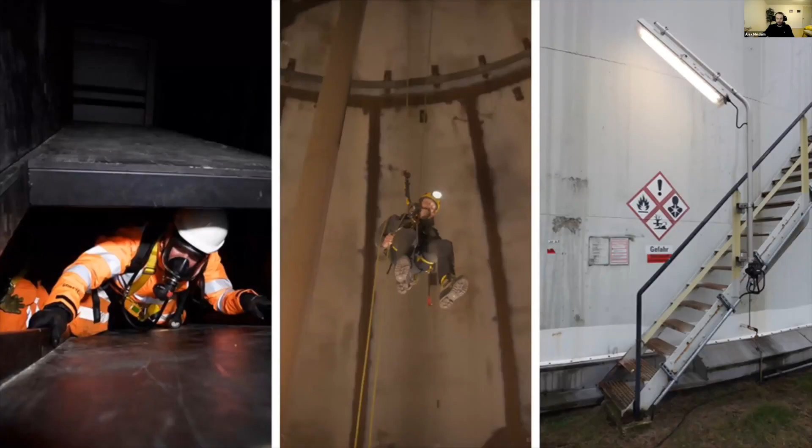A few words about Flyability. We're a pretty unique company in the sense that we are attacking a niche of an industry that is mainly focused on outdoor drones, from a pretty unique angle, which is that of collision tolerance and flight in confined spaces. We have one very clear goal, and that's no more humans doing dangerous jobs. Pretty vast indeed, but we're targeting three main work environments: one being confined spaces, the other being work at heights, and the last one work in hazardous environments - could be a radioactive environment or an area with toxic dust and things like that.

In terms of company, we were founded in 2014 after the Fukushima incident, where basically they were trying to get into that nuclear power plant. They weren't able to get in with ground robots because of all the rubble, and they weren't able to walk in because of the radiation. So a drone was the right solution to the situation, and that was really the inception of this technology that we're distributing today. We were students at EPFL at the time, but today we're a team of 100 people.

We have about 1,000 drones out on the field with 400 customers across the globe, and we have a pretty robust network of resellers and partners who can sell, distribute, and train. We work in a lot of different industries, ranging from oil and gas to public safety and power generation, chemicals, mining. All these industries have areas where you'd rather not send people in, and that's where we hope to help. Our clients are either large service providers, companies like Matt's, or asset owners who have an internal drone department.

Talking about indoor drones, they're very interesting technology. And before I get into the midst of it, I want to remind you it's still a pretty new and novel technology. I got a reminder of that a few months ago, right around here at Edgar Mine.

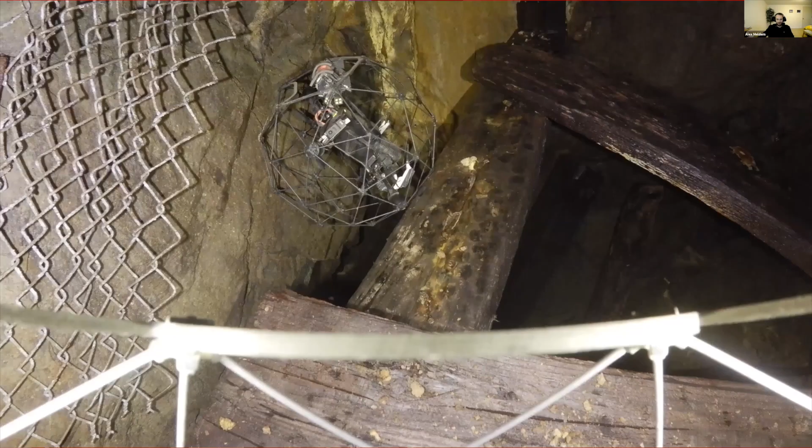You probably won't recognize where this picture was taken because it was in Edgar Mine, where nobody's supposed to climb up there. I was fortunate enough to, on my second flight in that area, get my drone stuck. The drone with which I took the picture of that drone also got stuck right next to it. That one I managed to dislodge and get back. The other one I now have in my possession again, but it is completely destroyed.

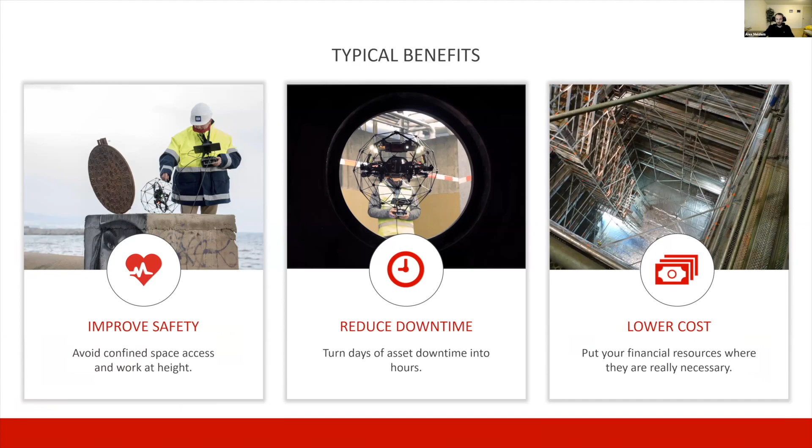Why use a drone for inspection in confined spaces? It's basically the same value proposition as any robotic solution. We're going to make the operation safer altogether. You're not sending somebody into a confined space or an area at risk of collapsing. We're going to reduce downtime because you're not sending people in, and there's much less equipment and time needed to get the job done. That all factors into lowering the cost. You don't need access installation or anything like that. You'll just fly in and out, making everything much faster and cheaper.

If we look at this in terms of actual facts, from a safety standpoint, I don't know if you're familiar with this chart, but I'm guessing you are: the hierarchy of hazard controls. Essentially, it classifies different means of controlling hazards from least effective to most effective, with the measures we have today being the least effective, and the use of a robotic device being the most effective, because you're eliminating the risk entirely. You're not putting a person in the confined space or dangerous area.

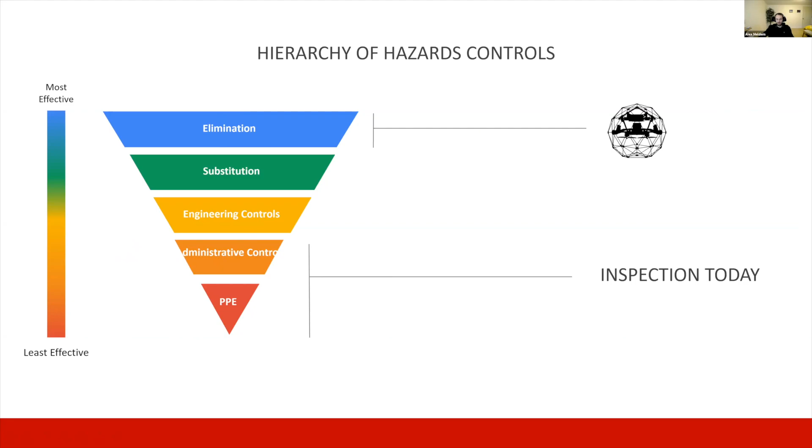In terms of duration, this example might not be the most noteworthy for your industry, but just to give you an idea: for a 500 megawatt coal-fired boiler, a classic inspection today, excluding the time needed to perform maintenance, takes about 11 days. You need a few days to cool the asset down to a temperature people can enter, then your crew goes in, sets up a scaffold, your inspection team comes in, does the whole inspection, and the scaffold comes down. It takes 11 days.

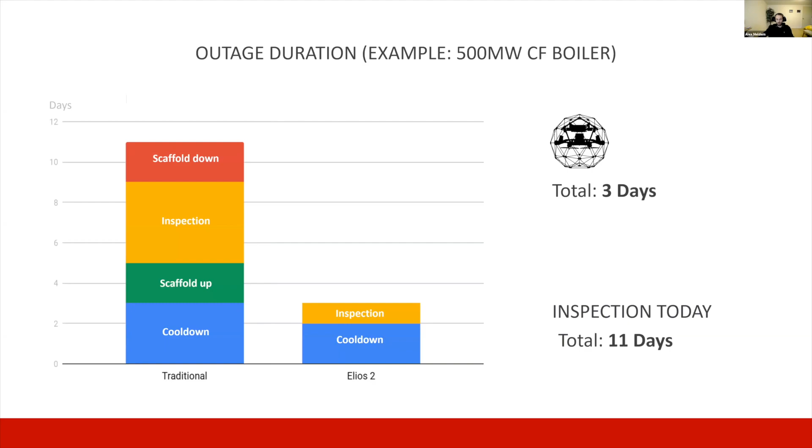With our drone, we can shave that down to about 3 days, because you still need to cool it down a little bit to get it to fly in there. But the inspection time itself is much smaller, and of course you don't need to set up scaffolding, making the whole thing much shorter. That has a significant impact on cost: this 500 megawatt coal-fired boiler inspection costs over $500,000 using the traditional method, but will be shaved down to about $100,000 using the drone, because we don't have the scaffolding and we have a much shorter downtime.

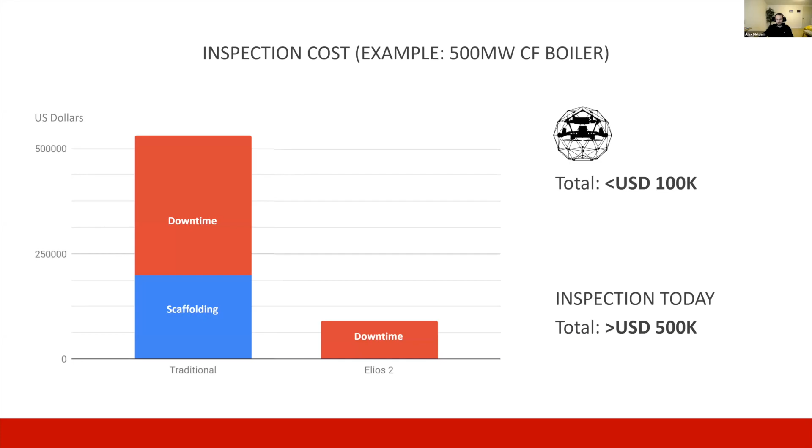There are a lot of other examples of how our drone can benefit a variety of industries. I'm going to skip over those because the main focus today is your industry.

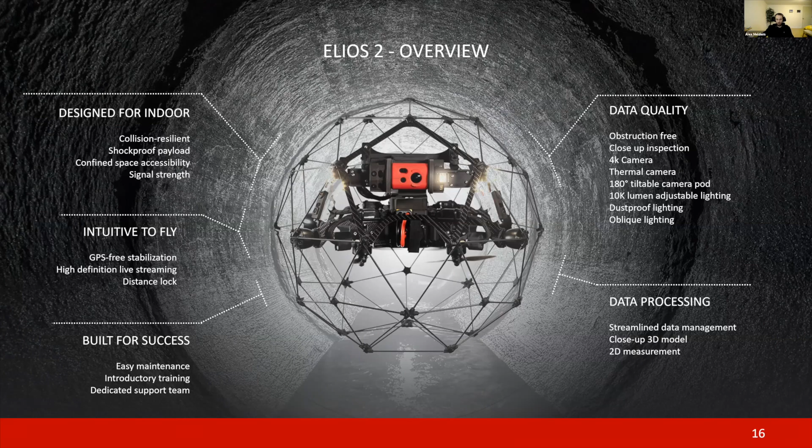So diving into the indoor drone and how we got to a point to build a technology able of going into these spaces: there were a lot of different aspects that went into this. It may look like a drone in a ball, but it's far more than that. We had to create basically a new system virtually from A to Z to make sure it was as proficient as possible at navigating environments that are dark, that don't have GPS, that may have a lot of dust or other particles floating around. There were a lot of challenges that went into that, and I'll get to them in just a second.

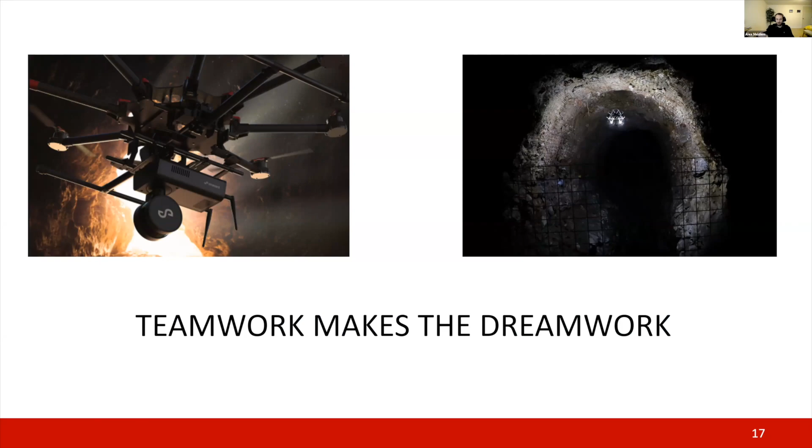Before I get any further, just want to remind you all: teamwork makes the dream work. It's a cliche in our industry, but drones really are a tool in a toolbox. While one drone can do one job, another can do another, and they're usually complementary of each other, as you're going to see with Matt very soon.

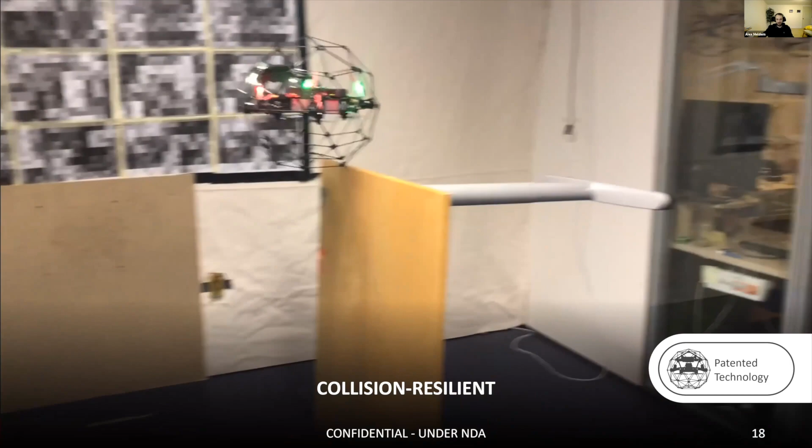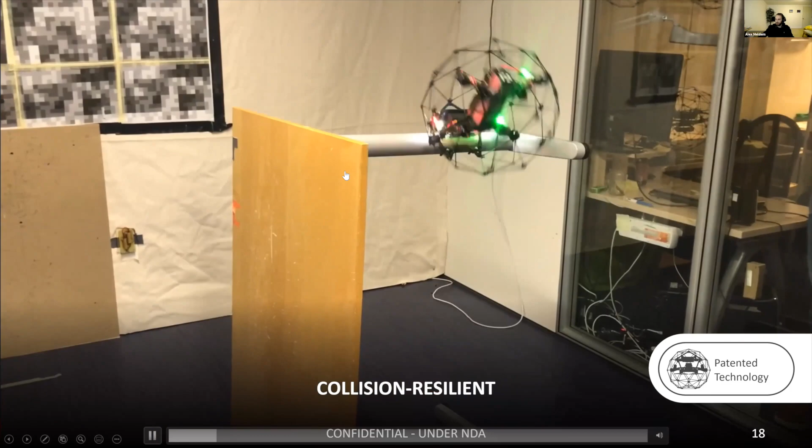Now, just to give you some insight on what goes into designing this technology for these environments: the first aspect we had to consider was collision resilience. We designed this to go into confined spaces, and one of the main aspects is that the drone needed to be able to bump into things and stay airborne. There are a few different things we did to make that possible. Obviously, the cage is pretty self-explanatory. What you're seeing demonstrated here are the motors, which can switch direction and speed of rotation in a split second, enabling the drone to stabilize itself in case of a collision. They were particularly designed for this drone.

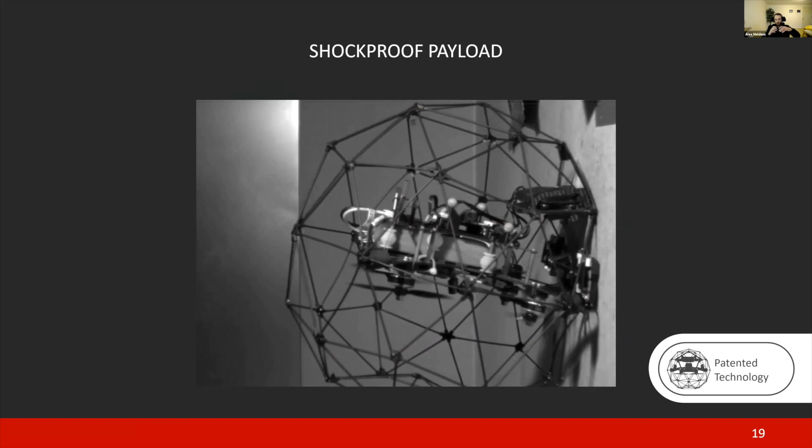We then have the whole payload built in a way where even in case of a full speed frontal collision, your drone is not going to fall out of the sky or anything like that. The payload is going to retract into the cage and pop back out once the collision is over. You might see a few zip ties falling out, but that's part of the design.

Essentially, the cage is going to be—the zip ties will be the first part of the cage to sacrifice, so that it can deform a little bit to keep everything safe inside. And it usually works pretty well.

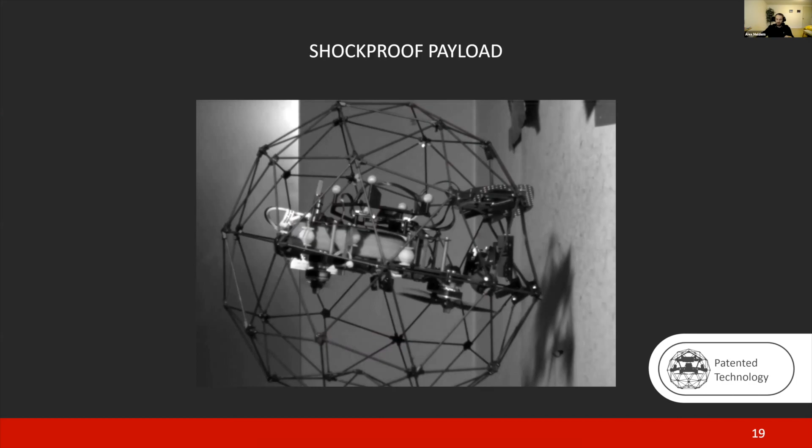Now, in terms of size, we're trying to fit in confined spaces, so we had to be able to fit anywhere a person could slip through. So we made this drone measure 15.7 inches across. In most cases, that's amply sufficient to fit through any space or a standard size manhole.

One of the main challenges in designing this drone is that we don't have GPS. As you know very well, inside the mine you can't really access GPS signal. So we still needed to create something that was not only an aircraft for the most proficient pilots, but also just a tool that engineers could pick up and use to get data when and where they needed to.

In order to do that, we tried to figure out a way to keep the drone stable without that GPS signal, and our solution is using a series of optic flow sensors, which send a signal out that bounces back against the nearest surface, comes back into the sensor, and informs the drone where it is in terms of distance to the surface. With that information, it's able to keep stable.

Not trying to oversell anything here. There are situations where these don't work in large spaces. These sensors do have limitations. Again, it's a new technology and we have limitations here. But in most cases, this feature allows you to basically let go of the controller and have the drone hover in place.

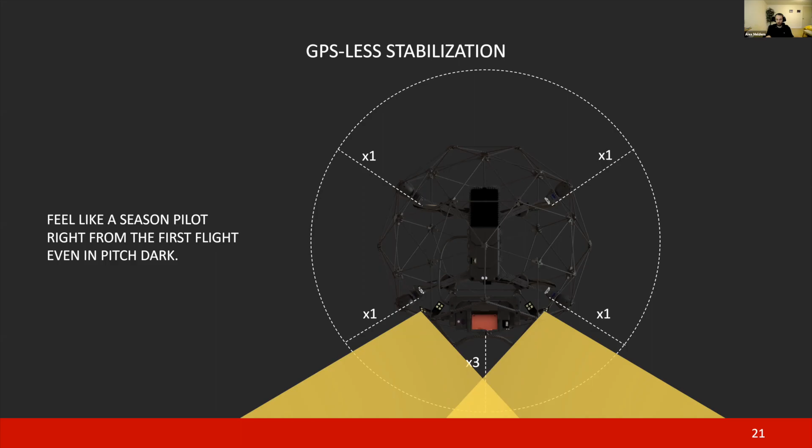Of course, at the end of the day, regardless how fancy the drone is and regardless of all the features it has, the most important thing it can do is collect data. It's a very fancy flying camera.

And so we had to make sure that the lens we had on there was optimal for what we were doing. So we have a 4K camera capable of taking 12 megapixel stills, but it's also a fisheye lens, which is pretty unique in the industry because the situational awareness component of flying in a subterranean environment is so much more important than when you're flying outside.

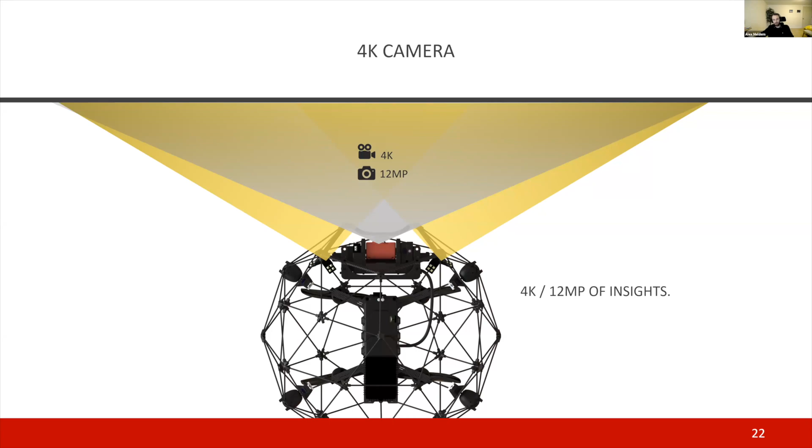Outside, above you, beneath you, behind you, and on all sides, you'll have air. In a confined space or in a mine, you have things all around you that you need to be aware of all the time. We can expand the view just a little bit with this fisheye lens, and that makes a world of difference in terms of knowing where you are while you're flying.

We also have a thermal camera on there. It's really good for detecting steam leaks and water leaks and things like that, faulty installations. It's a particularly useful feature for the nuclear industry, and it was one of the main drivers to implement this, because they need to know exactly where steam leaks are located, and they're able to do so with this payload.

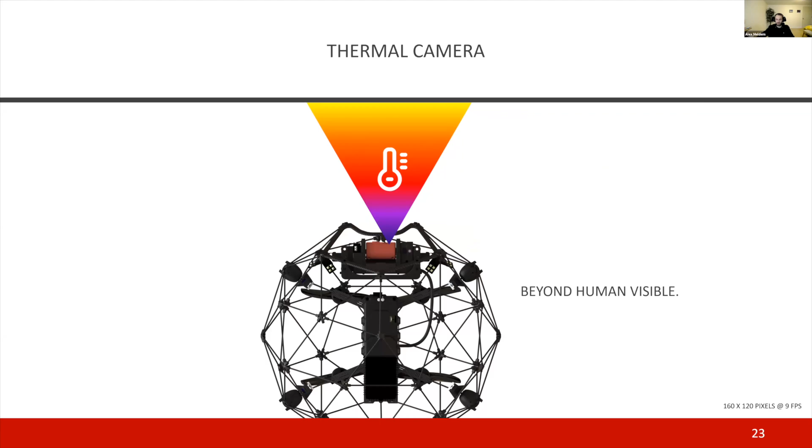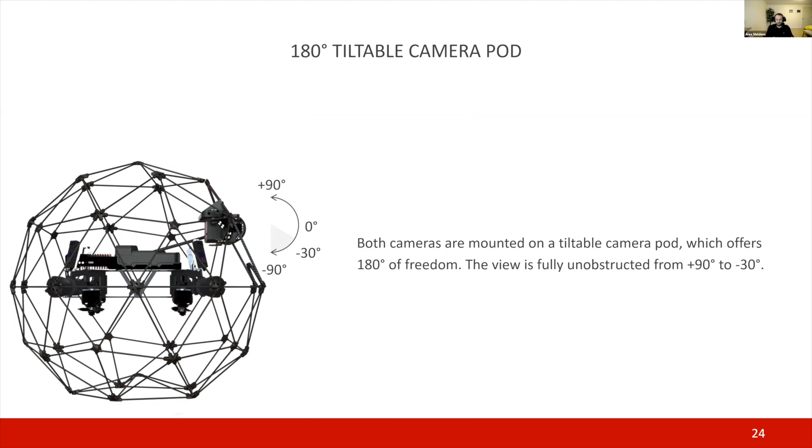The camera itself can tilt all the way up and all the way down, which is not necessarily something you'll find on most drones. It's really important when you're flying indoors, because the situational awareness component of flying in an indoor environment is everything. If you don't know what's above you or what's beneath you, there's no way you can move around as needed and perform your inspection.

Lighting was a particularly interesting challenge in developing these drones because the places we go into have no light. We had to figure out a way to bring light inside, in such a way that if we were flying in particularly dusty environments—which is often the case in mines—we wouldn't pick up on that dust too much, avoiding that snowy effect, to maintain situational awareness and the quality of the data.

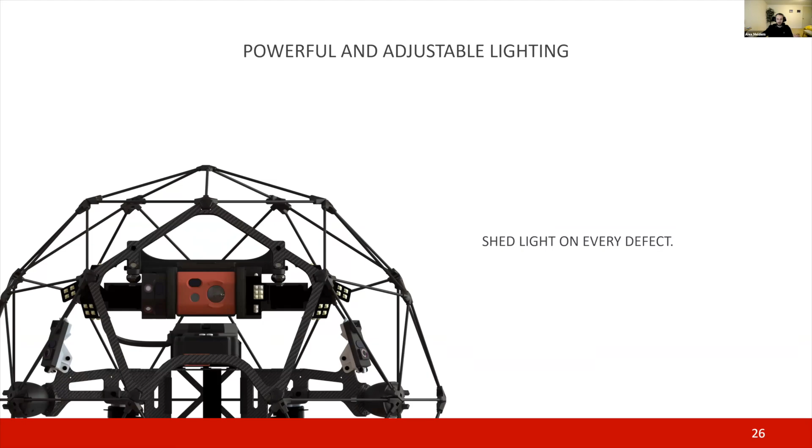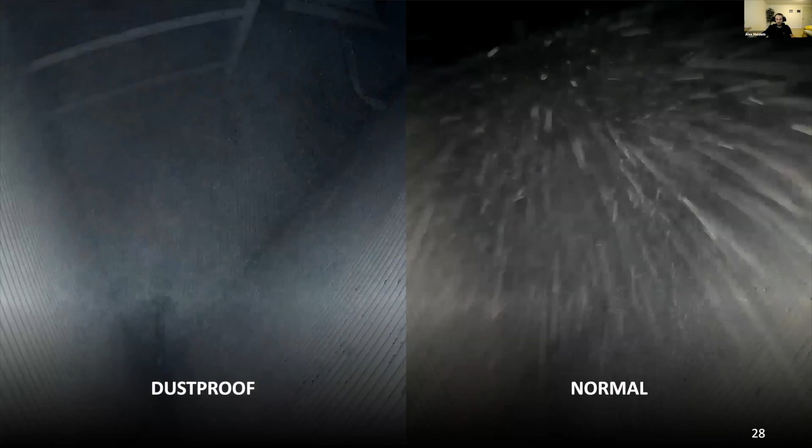Finally, this lighting system also needed to have a few features. I'm about to get to them. So the first thing we did was selective lighting to avoid picking up on the dust, and you see it demonstrated here. Essentially, the right image is full light coming in from the frontal lighting system, whereas on the left, it's the side panel shooting light to both sides so the camera doesn't pick up on the dust.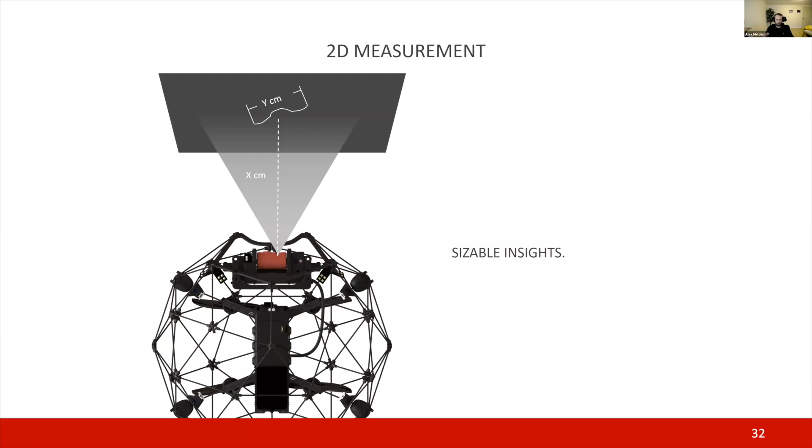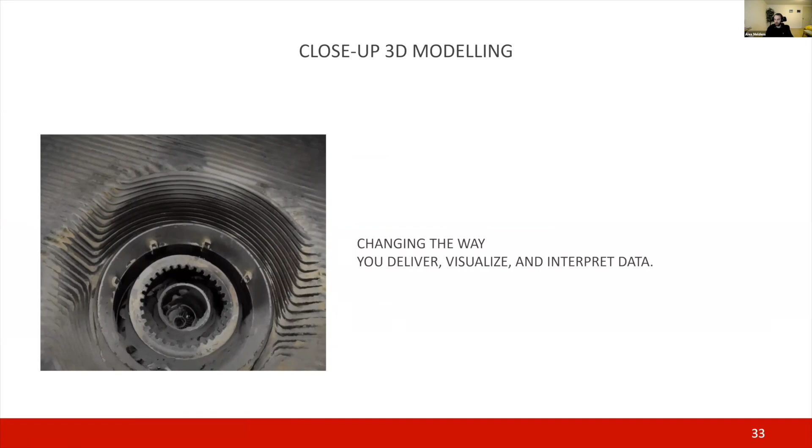So we had to come up with a few different things. The first is straightforward—with these sensors, since we can know the distance in front of us, we can perform 2D measurements, done in our software. You also have the ability to build 3D models using the data gathered from the drone, and Matt's going to expand on that way further, so I'll keep from it for now.

Finally, this is a brand new feature that's very exciting for us. What we did here is, within our post-processing software, add the VIO data from the drone and use it to process a sparse point cloud of the asset we've flown. It's a very meager replacement, I'd say, for having GPS. So what this does is basically map the inside of the asset—the mine or whatever—so that you can locate any points of interest found while flying.

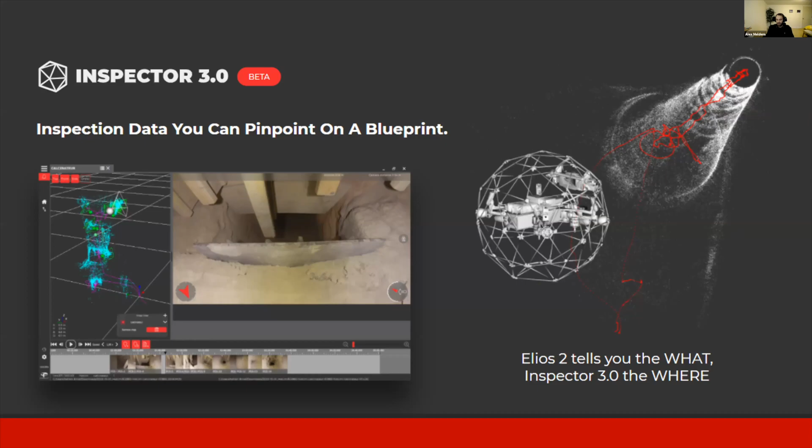You'll be able to pin those within this map created using the VIO off the drone, and it'll also track the flight path and give you distance information. Still very early in terms of release—we released in November, we're running the beta program now, so we don't have tons of information yet on accuracy, but hopefully we'll have more soon. With all that said, I think I've told you enough about how we get around to creating these drones.

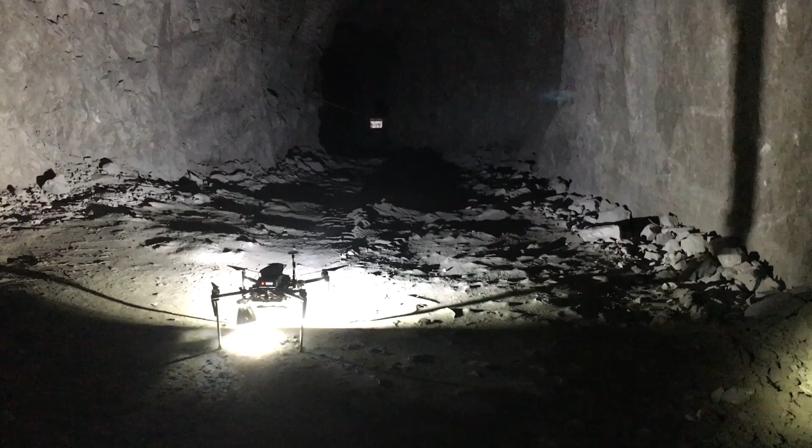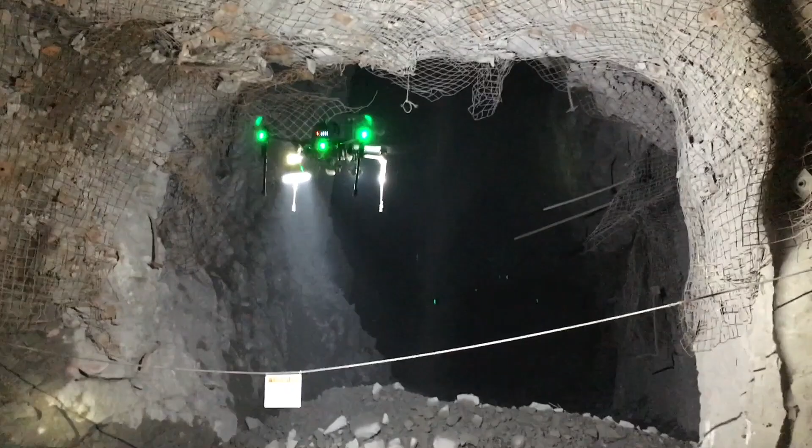7:35, stope flight 1, August 31st, 2018. All these videos are sped up, and I'll talk over them. This was a testing flight—we were running a sensor that the manufacturer wanted us to try. We were getting ready to enter the stope to do our testing flight, and I'll let the video show the rest.

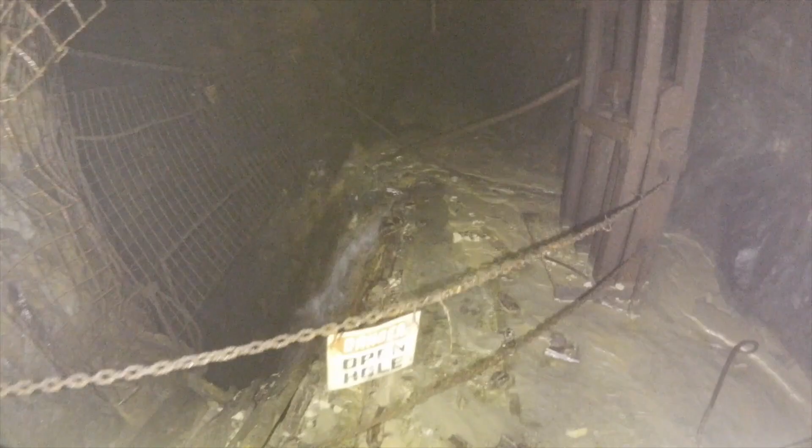So it's a pretty typical mine that we'd go into, one that would be either in care and maintenance, or that they'd want to get back into after it's been closed down for a number of years.

This highlights the type of areas that anybody in the mining world knows are extremely hazardous to access, knowing there could be open holes anywhere. When you have wall-to-wall material, muck, and mud on the floor like that, anywhere can be an open hole you could potentially fall into.

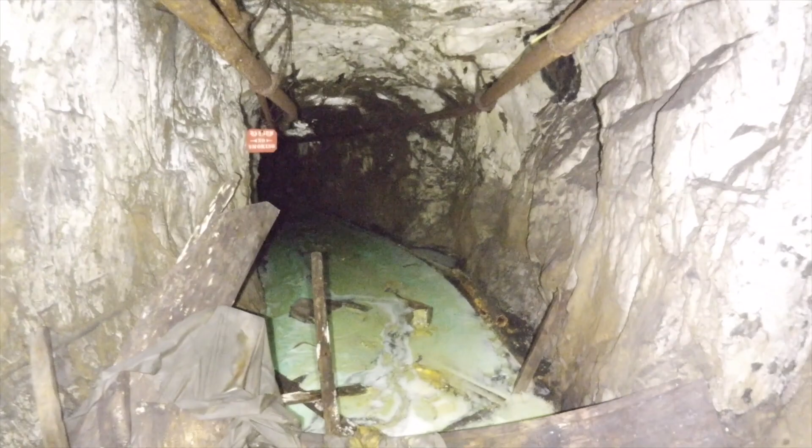For a lot of these mining operations, to safely access these areas allows them, number one, to gain a bunch of information safely in an area that's unknown, and number two, to go back at the end of the day or after the flight and review all the footage to formulate a plan for how they're going to get into these areas, whether to rehabilitate them or whatever the case is.

I wish Zoom could play the videos a little smoother, but hopefully this is coming through on everybody's screen. This is just some typical areas we regularly operate in, but the one thing I hope is coming through is the range, and how far we're able to go away from the operator.

All this is done without the range extender. Flyability was proactive in creating a range extender and making that option available. So when you come into areas like this where you need extra range, but can't physically get yourself and the controller there, you can throw the range extender out, put it on a buggy and drive it out, or on a cart and push it out - giving you the ability to extend your range that much further. Plus, you can add a back plane to it to essentially make it almost a directional antenna, which also increases your range to let you get into these areas to get the information.

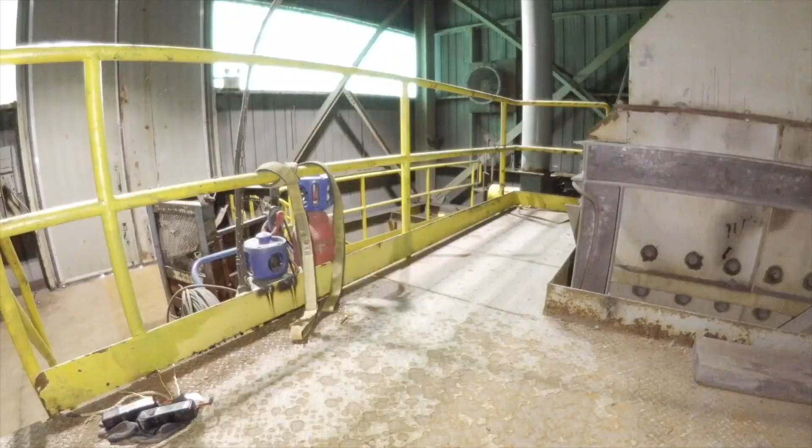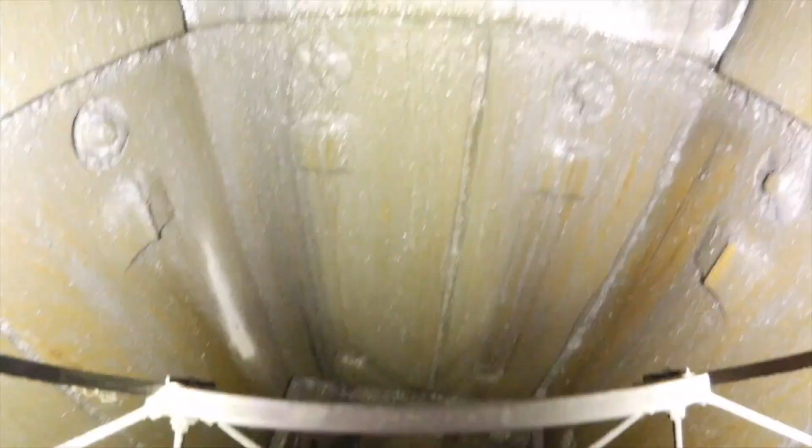And that's the benefit Alex was talking about earlier of having the cage designed the way it is, with the 16-inch footprint. You'll see some videos later where things don't go exactly as planned, and the flight isn't as smooth, with material coming down on the drone in certain ore passes and bins. Having that cage and being able to take an impact where any other drone, open-propped or with a traditional prop guard, would essentially be destroyed, gives you the extra resilience to take a decent blow and still have the drone steady itself—which Alex showed a great example of with the test of it tipping over.

So when you're taking a lot of material coming down onto your drone, it's nice to know you have that cage, and a lot of really good engineering and testing went into it that's able to get you in and out of these areas.

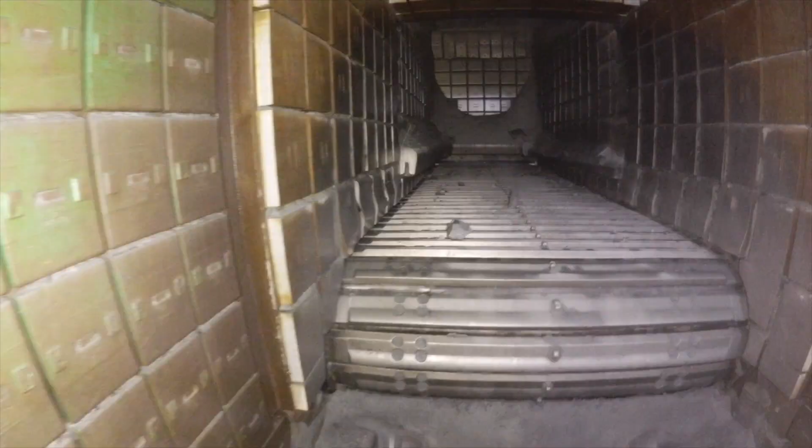This video is a great example of a client doing a regular routine inspection. They were pulling the bin down, just planning for maintenance, and wanted to see how much accretion and buildup there was. While we were in there, we were flying down into the chutes to try to inspect the plates and liners. They expected everything to look like the last example where all the plates were installed, but instead they found a huge gaping hole.

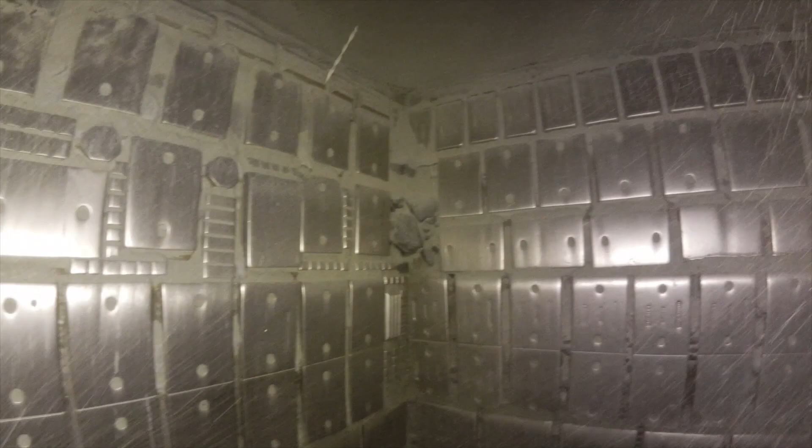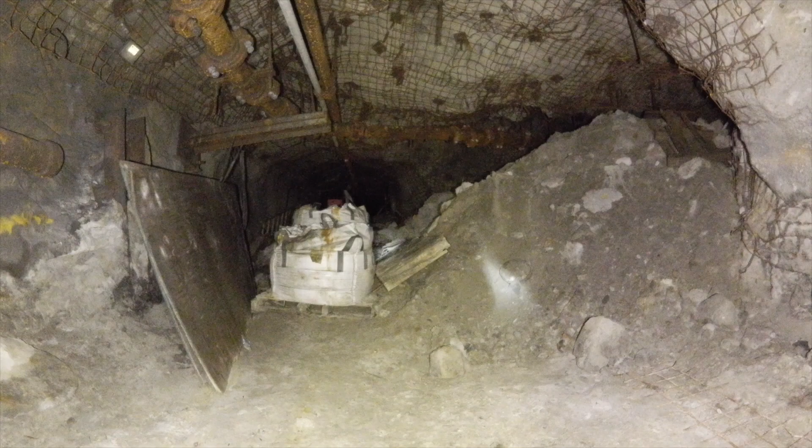Here's another great example for anybody in the mining industry who knows you never go into any equipment without locking and tagging. In this video, the timing worked out so there was very little downtime between when they had the crusher empty. They had pulled basically the last of the material out and gave us the green light to go in. If you look up, you can actually see the crusher still moving—so there's no way you'd ever conduct an inspection with the equipment still operating.

However, with the Elios drone, you're able to stand well back of the feed chute and still conduct an inspection and identify any potentially missing plates or liners.

Here is a great example of when stuff doesn't quite go as planned. In this one, unfortunately, you can see a little hook sitting there—our pilot isn't able to go any further because he got hooked on that little hook.

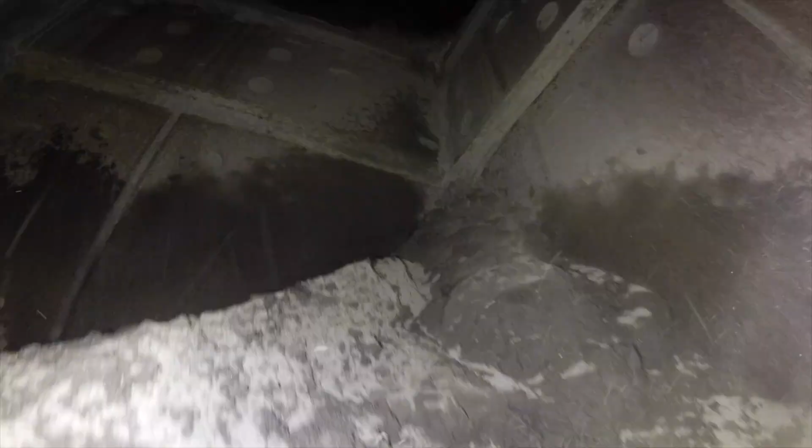During this, he was right at the edge of his radio link, so his video was coming in and out. He still had command and control but was trying to unhook himself essentially blind. Kudos to him—he managed to unhook himself, then got wedged again a second time. Now he's way up in the back and has lost all video, so he's essentially flying off memory, remembering where he got himself up there, the lay of the land, and that there was that hook and plate.

And he manages to somehow get himself unhooked and manages to fly back.

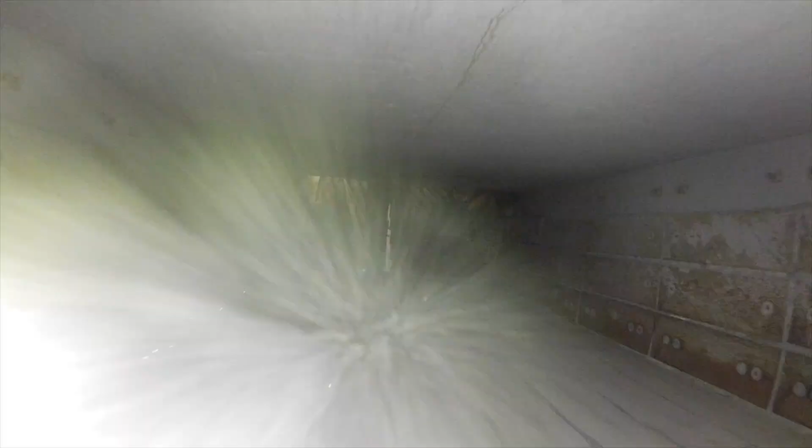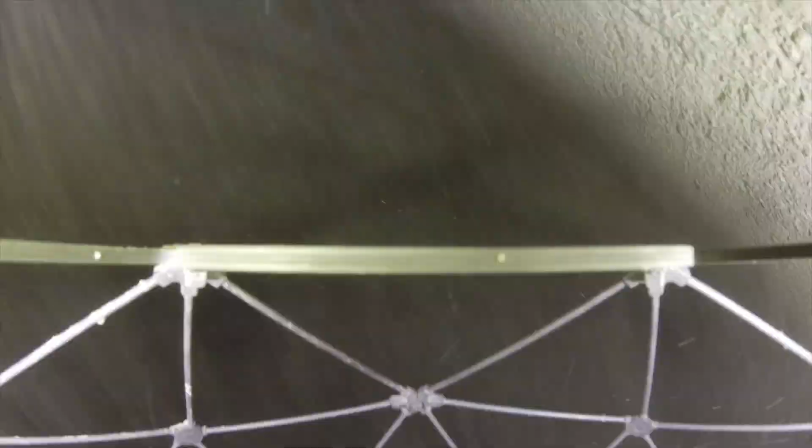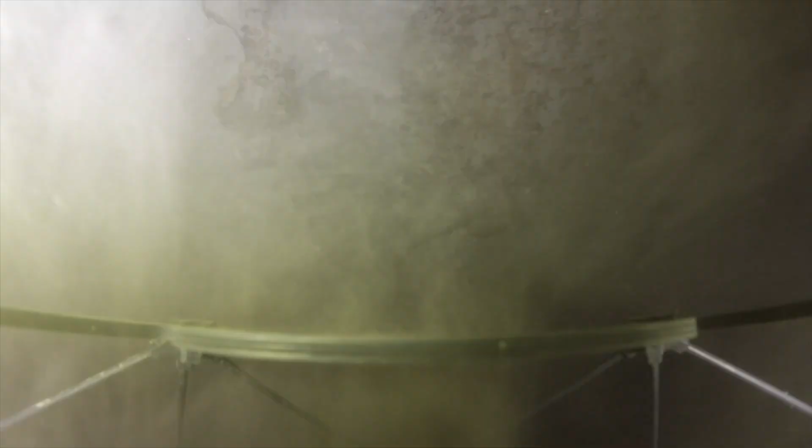Here's a great example of the cage and why it's nice to have it. It's not that we ever rely upon it when doing an inspection—it's more of a nice-to-have rather than something we're utilizing during the inspection to bump around. It's another perfect example of an inspection being conducted without interrupting work downstream, since we're flying in with a robot, there's no major concern of the inspector being underneath those employees.

But here's when it's nice to have the cage. Kudos to Flyability for spending the time on testing—I don't think they ever ran their machine through a rock blender or turned their robot into one, but we decided we could test that for them, and here's the result. All four props were still intact, and we were able to fly out safely and hand the client the data.

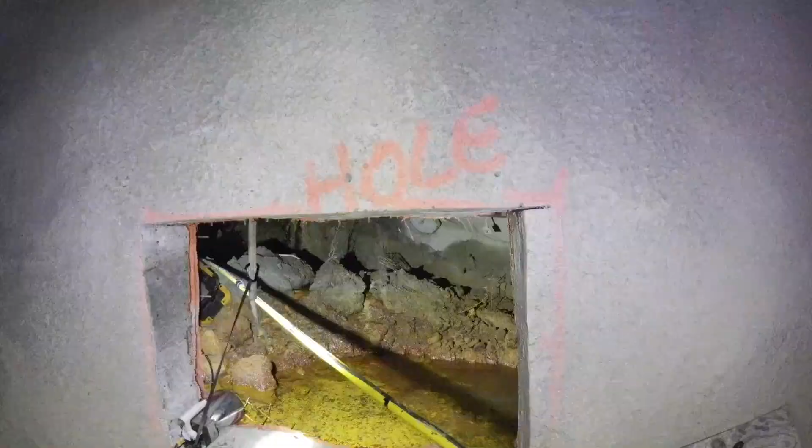Just as a quick side note, we did test it as a rock blender. Oh, perfect. Well, it definitely passed.

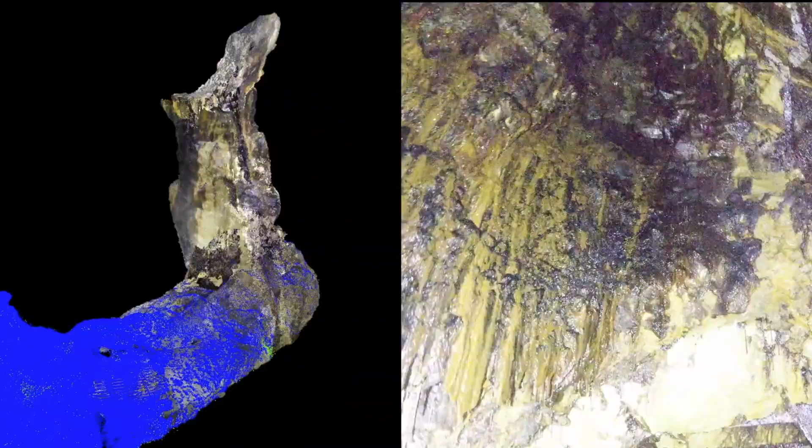Here's a great example of a tethered drop. Sometimes we're asked to do vertical inspections, going back to 2017-2018. The one limitation with the Elios drone, and almost every drone, is battery life. With 10 minutes of usable flight time, you're not going to effectively inspect a 1,000, 2,000, 3,000 foot vertical raise.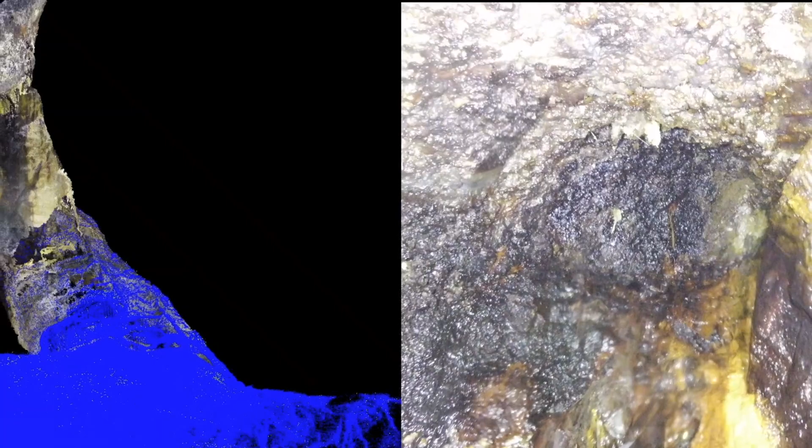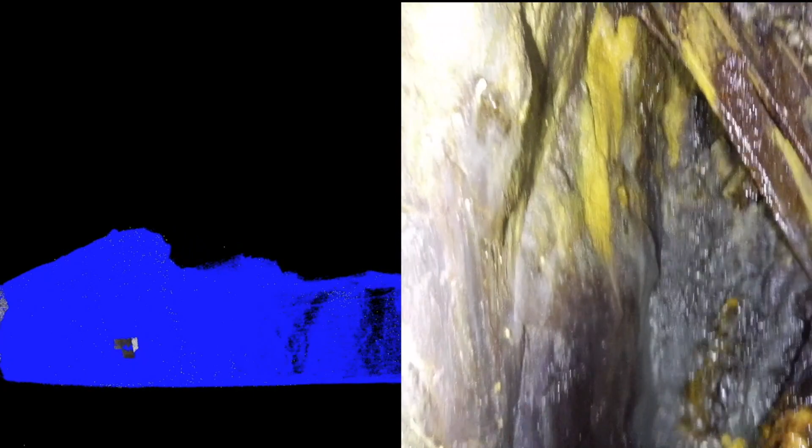However, if you hook it up to a tether and lower it down - a lot of mining people here will relate to a GoPro spinning wildly on the end of a rope. Instead of that, you can hook up the Elios and have full control over your direction, your azimuth, how you're looking, as well as the tilt and your lighting. So there's a lot more you can do with it than just flying. That's just one other way of deploying it.

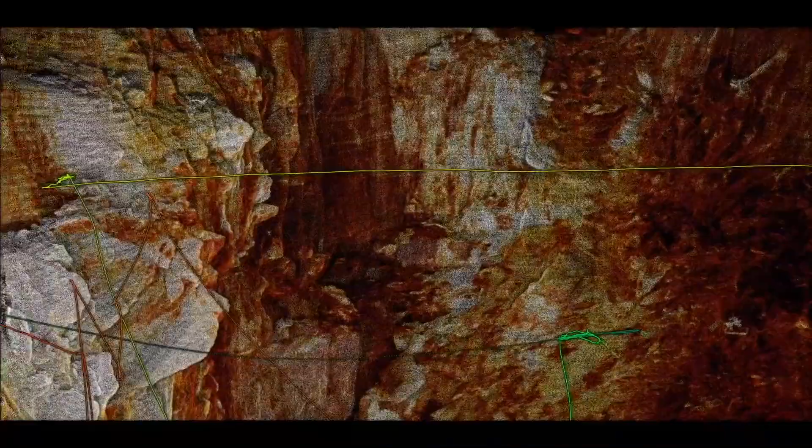This is an example of integration of sources - utilizing the Hovermap, our laser scanner, as well as the Elios to create a photogrammetric model. You can see the conditions are terrible inside, we're getting dripped on left, right, and center. But to our surprise, we were still able to put together a fairly reliable model that scaled properly, and we were able to tell the client where their blockage was.

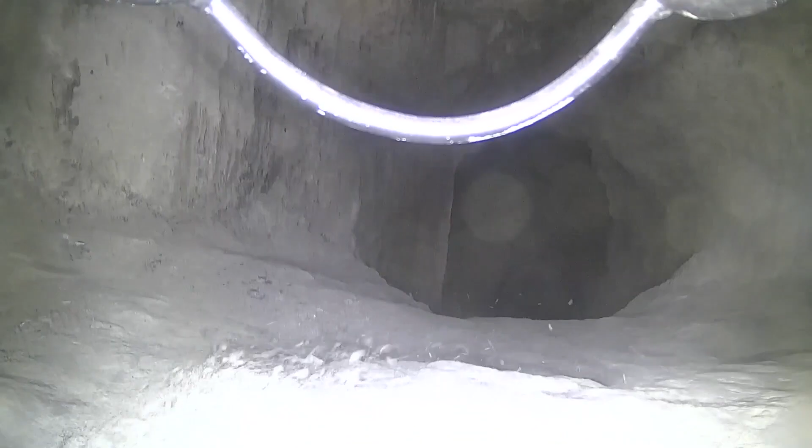Now we're getting into the Emesent technology, and this is the supplementary side. When we have the opportunity to get into larger areas and get our laser scanner in, this is the results that our clients expect to receive from us during a flight. This is a fully autonomous flight - the lines you're seeing are the actual flight path of the drone and the waypoints. There'll be another example of it coming up.

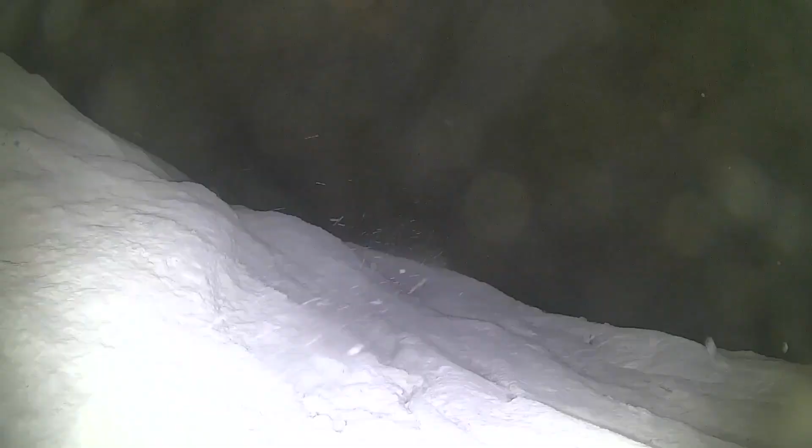This is an example of one of our ore pass inspections with our buggy, and I wanted to throw this in because it ties in perfectly with the space mining theme, just with the way it looks. There's a lot of similarities when you're operating underground to being on another planet - you're in an inhospitable place where literally the roof can fall on you, the back can come down on you at any moment.

This is a great example of that type of unknown environment where you have to have everything working properly, much the same as a rocket being sent to another planet. You only get one shot at it, so you have to have everything go right to have a successful mission. But if one single thing goes wrong, you could be losing your ore pass, your buggy down at the bottom of an ore pass.

These are just some more examples of autonomous flights. The great thing with the Hovermap system is it has an onboard GPS-denied position hold as well as collision avoidance. If you jump on YouTube, they have a video Emesent does of it basically avoiding and flight planning around a 1mm wire. So it's quite reliable when you're operating in areas where you have no idea what you're seeing.

This last video shows what the client sees versus what we actually see when we're in the field. We have an amazing geospatial specialist within our office who's able to take environments where you're dripping water and in a complete downpour - and anybody involved with laser scanning knows how much noise is introduced by that - and have it cleaned out and delivered as a scan to a client. That's essentially what we do.